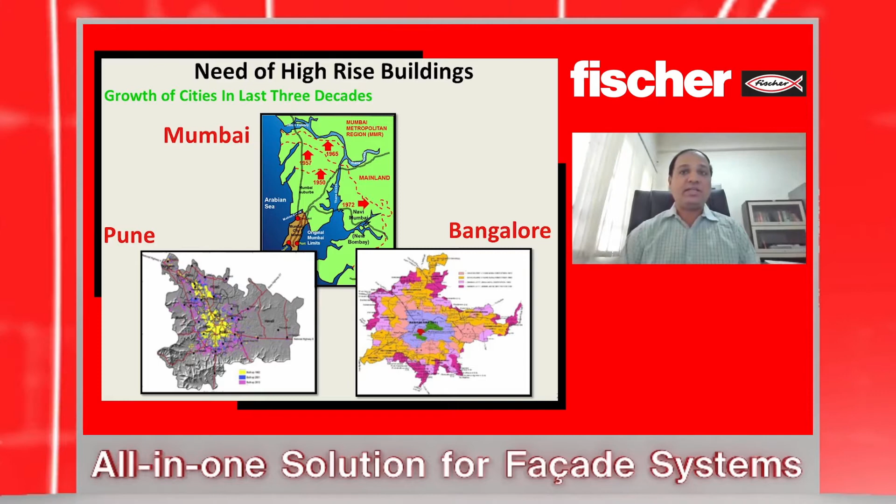We can't afford to expand our cities further because we need to make sure occupants remain connected to educational hubs as well as commercial hubs. As a result, we need to use land more efficiently so that we can accommodate people as well as workspaces in the available land. So then there is a need for high-rise buildings.

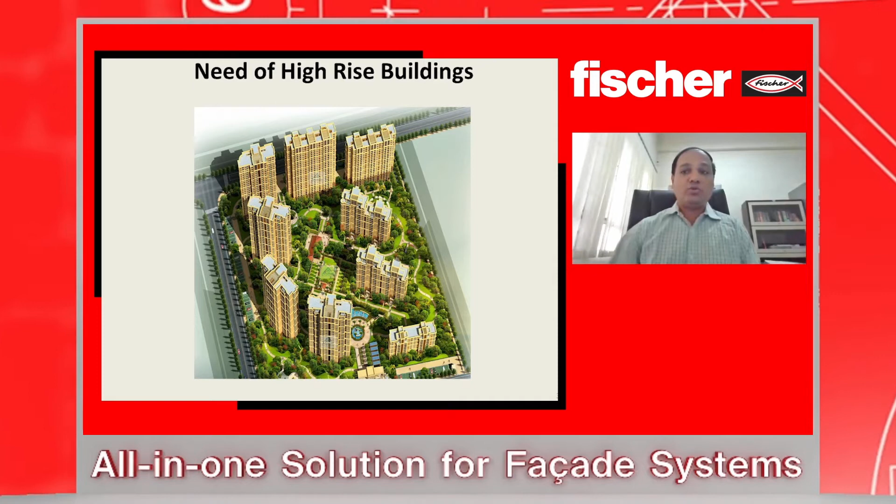Traditionally, if you look at high-rise buildings constructed a couple of decades back, they were constructed with concrete, and infill walls were made of brick masonry. The problem with this kind of construction is that brick masonry walls put up substantial dead load, and as a result there is a great need of engineering material, which adds to the cost. To solve this, there are facade systems which are useful and which reduce the dead load substantially. This is one characteristic of facade that reduces the dead load of the building substantially.

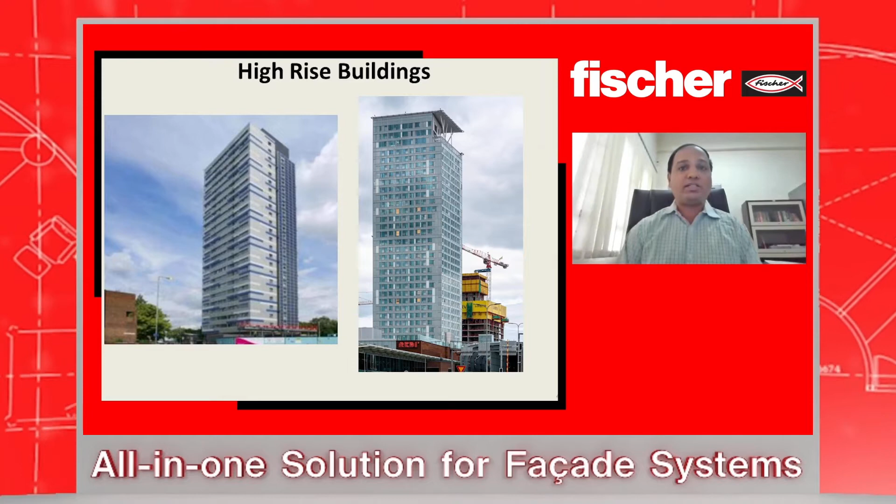However, there are several more advantages of facade systems, and in order to understand those, one needs to first understand the various kinds of loads which typically occur in a high-rise building. As engineers, we know the typical loads coming onto a structure are of two types: gravity load and lateral load. Gravity load comprises the dead load and live load, which act in a vertical direction, while lateral loads are caused by wind actions as well as earthquake actions, and act in the lateral direction.

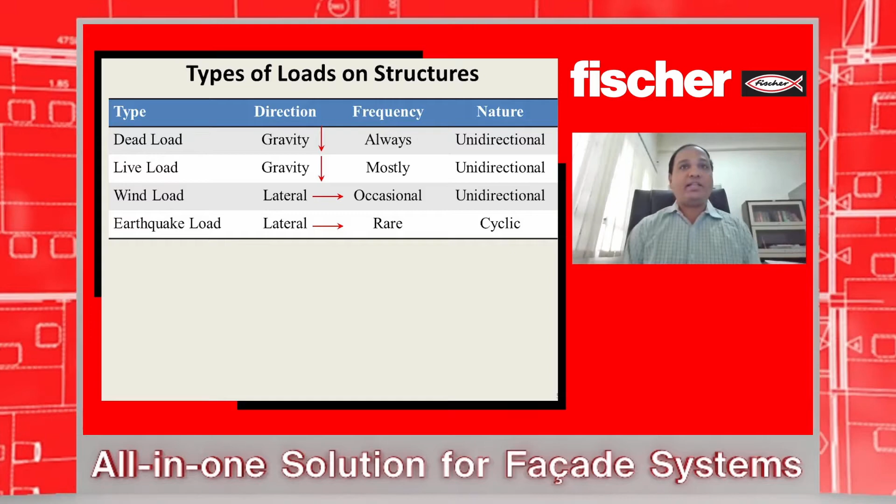Whenever we design a building, particularly a high-rise building, the vertical load is naturally taken care of by the structural elements, but special care or attention needs to be given to carrying the lateral load to the foundation. For that, we need an efficient system along with a built-in lateral resistance system. So to understand that, let's quickly understand the behavior of various lateral loads. We have two loads: wind load and earthquake load.

The fundamental difference between wind load and earthquake load is that wind load is a load exerted by the wind on a building. On the other hand, the earthquake load is not a load that is exerted externally. It is typically the load created because of the mass of the building.

So what happens during an earthquake? The ground shakes in one direction and the building tries to remain at its position. Because of that, there is an inertial effect, and due to this inertia effect, a force is created on the building, which we can calculate using Newton's second law. So the earthquake load is a more implicit load, while the wind load is a more direct load.

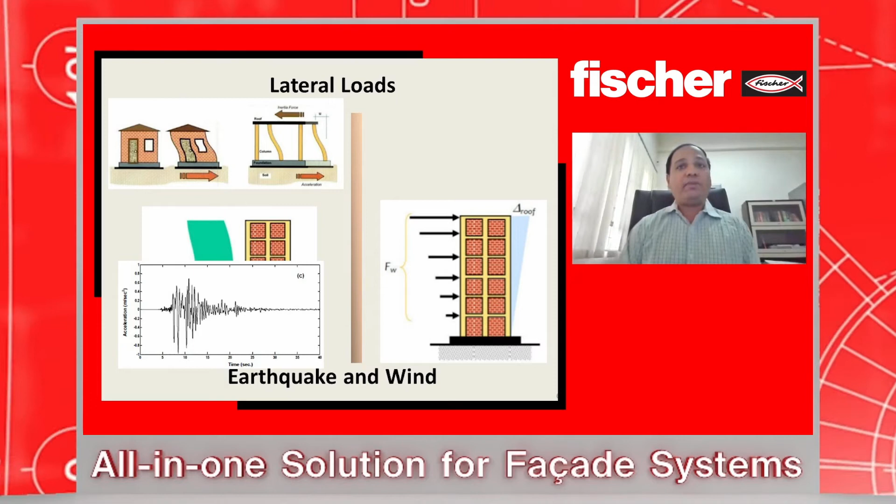Another difference between these two loads: the load pattern of an earthquake is cyclic in nature, while the wind load usually acts for a significant period of time only in one direction. As a result, high-rise buildings are typically governed by the wind load compared to the earthquake load, and we will see the reason for that in a while.

If you consider a wind load acting on a structure, the wind load acts only in one direction, and the magnitude of the force depends upon the surface area of the building. In high-rise buildings, since we have smaller plans and larger heights, the surface area of the building is substantially high.

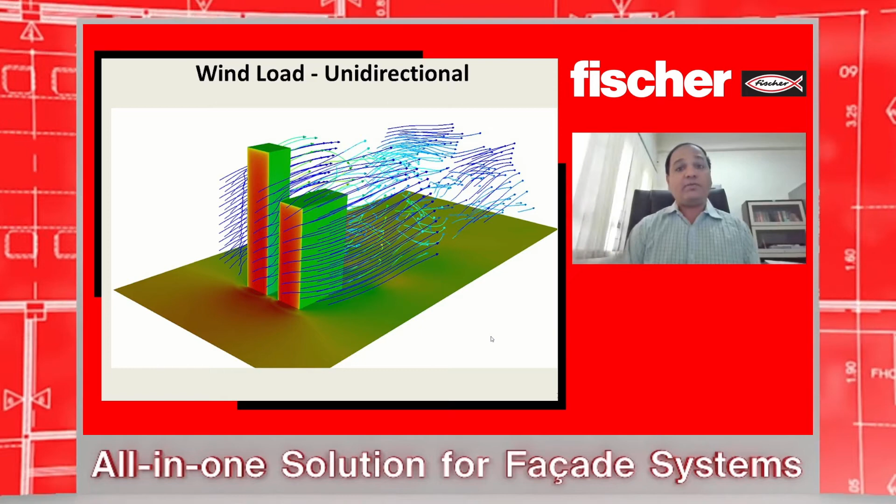As wind blows along the building direction, it exerts pressure, and because of that, the building deflects in the direction of the wind. Typically, since wind is a non-cyclic load, this deflection causes a P-delta effect, and because of this P-delta effect, the gravity load, which is acting at all times, can cause additional deformation. This can create a problem in a high-rise building, because you need larger stiffness to ensure the building is not deflecting excessively, but that would lead to an increase in the cost of material and construction.

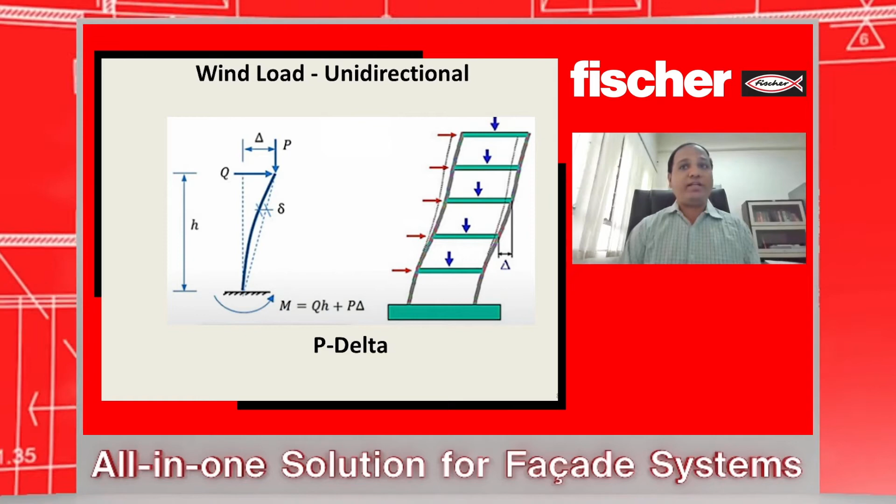So what is the solution for this? If we could change the direction of the wind in such a way that it acts in the reverse direction, so that the deflection of the building can naturally subside, that would be useful to reduce the deflection and reduce the cost of construction of the building.

So facade systems are useful to create such a change in the direction of the wind. Typically, when a facade system is placed on the building, it changes the direction of the wind, which we call the vortex effect. Because of that, there is pressure now acting in both directions when the wind blows in a single direction, and as a result, it reduces the deflection of the building and reduces the P-delta effect.

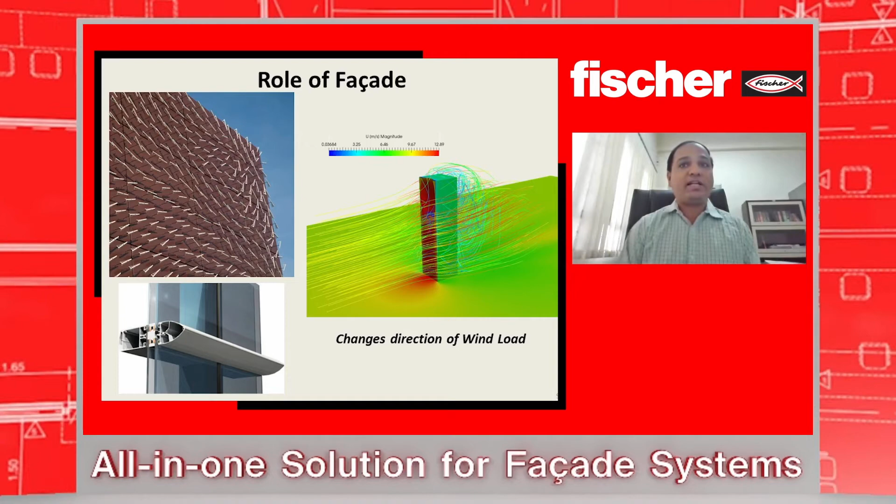So facades play a very important role in the design of high-rise buildings, particularly when those buildings are governed by wind loads. Another useful advantage of facade systems is that they also add strength and stiffness to the building. Whenever there is an addition of strength and stiffness, we could use that property to resist the earthquake load, because earthquake loads are typically resisted with the help of strength, stiffness, and ductility.

So facade elements also provide us places to dissipate energy. In addition to that, the facade structure provides us the space to accommodate various kinds of energy dissipation measures, such as friction dampers as well as fluid viscous dampers. Nowadays there is a lot of research already being done to install these dampers in facade elements.

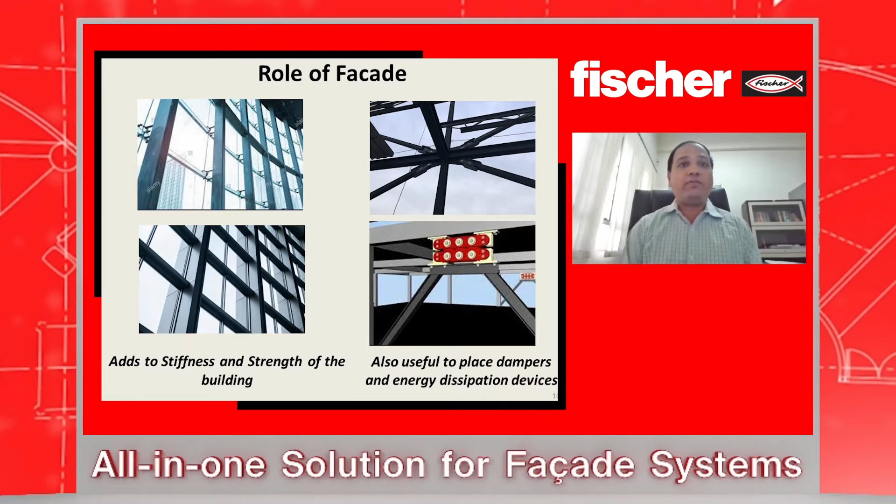So as we can see, facade elements are an integral part of high-rise buildings, and they are very important when it comes to reducing the earthquake and wind effect on a building. But in order to ensure that the facade system works efficiently, we need to connect them rigidly and efficiently to the main structural system. So there comes the important role of the anchor.

In another application, we could see that the role of anchors is also very important in other areas, which is repair, rehabilitation, and retrofitting. Typically, as a civil engineer, we tend to focus more on the creation of new buildings. However, with the large number of existing buildings, there is also a large need for doing repair and rehabilitation of existing buildings.

The reason for that is that we also need to reduce the carbon footprint to reduce the effect of man's activities on the environment. So there is a need to ensure that existing buildings will last for a longer duration, so that there is less need of creating new buildings.

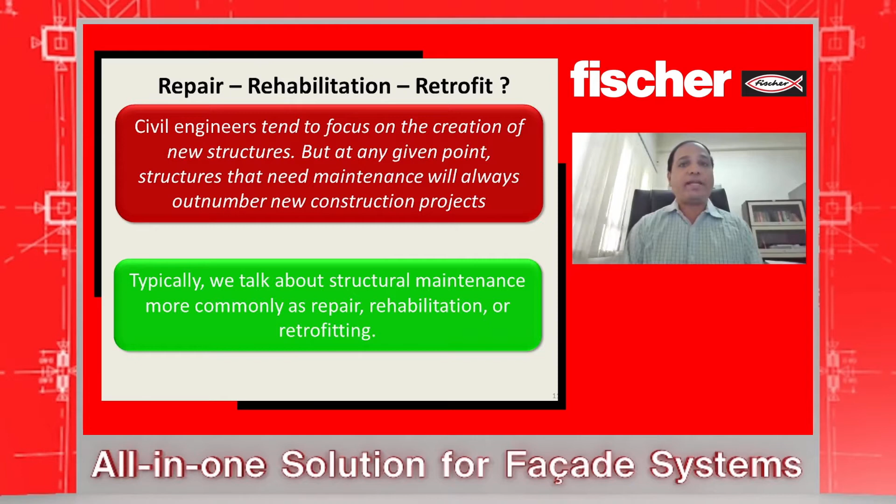So for that, the typical terms which are used are repair, rehabilitation, and retrofitting. We'll quickly see the meaning of these three before moving to the application of various systems for repair and retrofitting, and the role of anchorages.

Typically, when you have a building that deteriorates over time, and let's say if there is an extreme event like a hurricane or earthquake, there is a substantial drop in the strength of the building. Now, if you carry out any activity which increases the strength of the building to the strength it had before the event, then we call it a repair measure.

If we improve the building such that the strength increases to the level it had at the time of construction, then it's called rehabilitation. While if we carry out a measure in which we increase the strength of the building so that it meets the current standard, then it is called retrofitting.

So these are the three terms which are commonly used, and depending upon the usage of the building, we can choose any of these three measures.

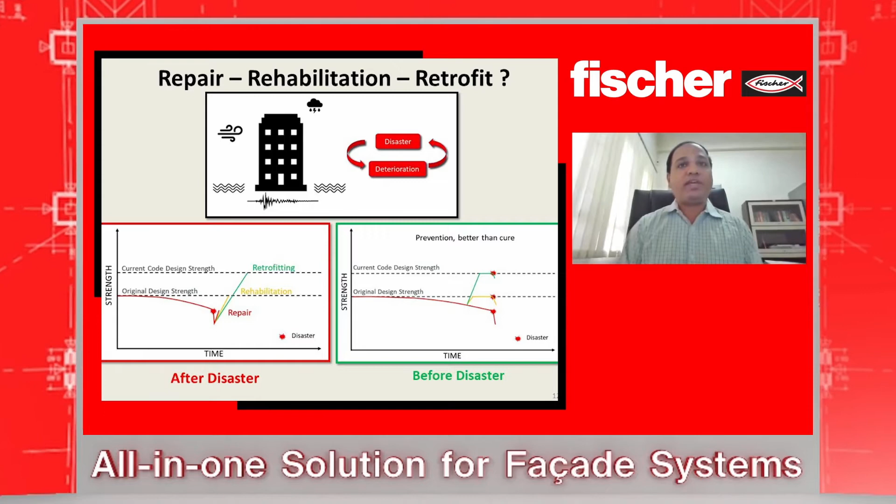There are various techniques which have been developed over time by research engineers that can be placed into the existing building to improve its strength and carry out retrofitting activities. However, the important problem is we need a system to connect these additional elements in the existing building, and for that we need various kinds of connections and anchorages to connect this system with the existing frame elements.

Thankfully, much research has been done, and various anchors and processes developed by companies like Fischer can be efficiently used to connect such braces in the existing building for retrofitting and repair measures.

So in conclusion, we need several anchorages, not just for connecting braces to the existing building, but also for connection of facade in case of high-rise buildings.

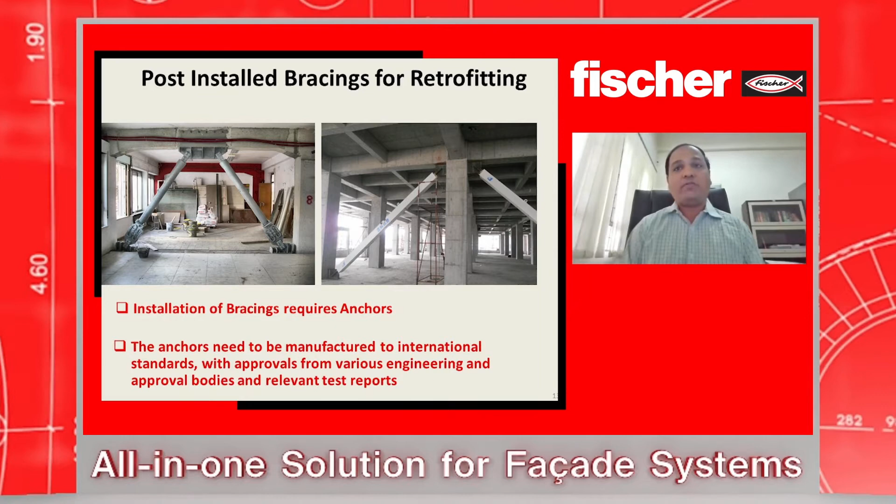I'm very glad to see that Fischer has taken a step to organize this event, which is beneficial to practicing engineers. I congratulate Fischer company as well as its employees for arranging this event for professional engineers. So my best wishes for this event. Thank you.

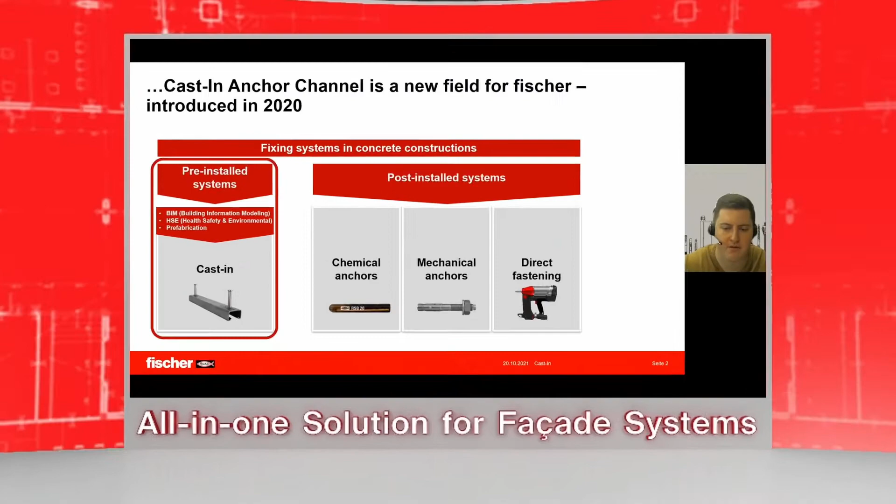What does cast-in system even mean? In the year 2020, we decided to introduce the cast-in anchor channel as a new field for Fischer. We can see here there are various fixing systems, most of them classified as post-installed systems. For example, we have the chemical anchor, the mechanical anchor, and also direct fastening options. Now we're also going into the option of pre-installed systems, which would then be basically any type of cast-in, in our case specifically the cast-in channel.

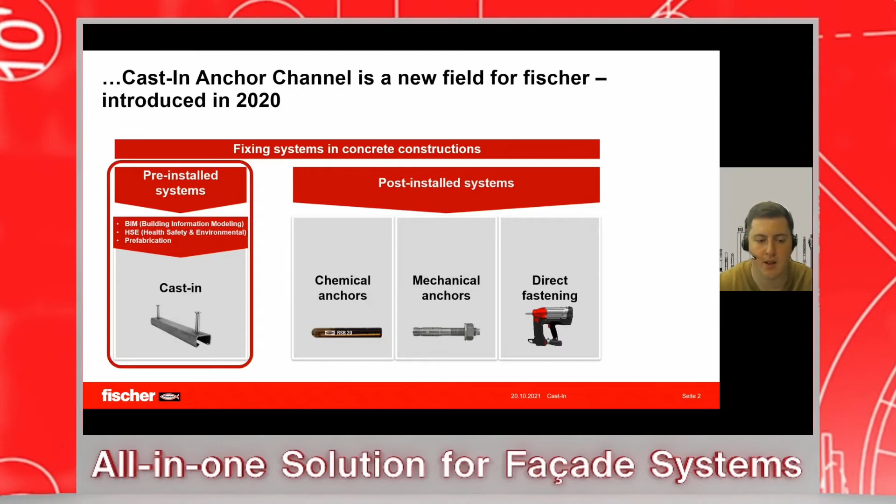We believe that cast-in will one day be the leading fixing method for new concrete construction, and there are a couple of reasons pointing in this direction. That's also why Fischer, commonly known as a company that manufactures post-installed anchors, has now decided to go into the pre-installed business as well. One reason is building information modeling - we know nowadays we can pre-plan everything a lot better, it's easier to pre-plan. And the question always arises: why, if you pre-plan everything, would you still want to actually drill into the concrete?

Second would be health, safety, and environmental regulations. On some job sites globally, there are already restrictions on noise level, so drilling is not seen so often, or there are dust-free job sites where different drilling technologies have to be used, and so on.

Also, we can notice that globally the level of prefabrication is generally rising, so it makes more sense, if you already prefabricate the concrete element, to implement the anchoring elements or whatever you need already in the factory and not do it afterwards on the job site.

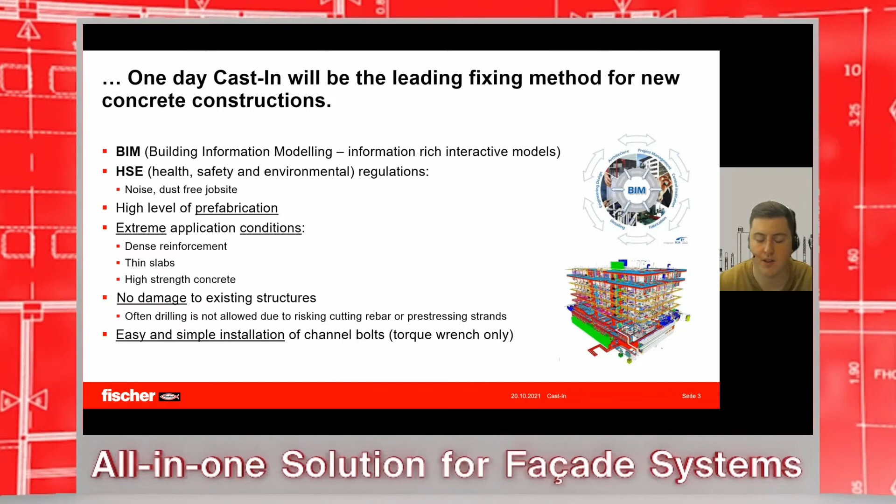Also, more and more we face extreme application conditions, mostly dense reinforcement. I think we have all faced those issues when trying to drill into a slab and just not getting through because there's so much reinforcement and the concrete is also so high in strength. Also, we avoid risking any damage to existing structures - sometimes drilling is not allowed, so this helps with that issue. And then it's also quite an easy and simple installation: after we have fixed it into the concrete, we just need a torque wrench, no special machinery or tools.

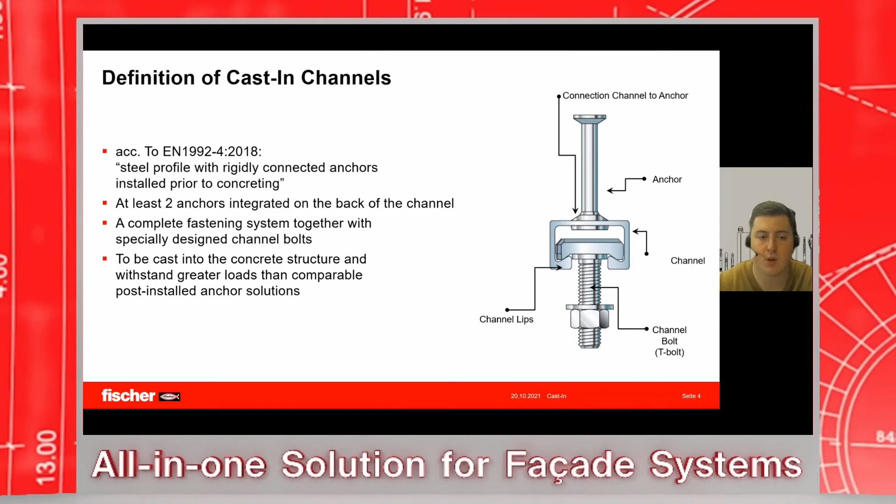Speaking about the cast-in channels, you can see here on the right side we have our anchor. On the back we have our channel, of course. We have the connection channel to anchor, this is sometimes referred to as well. We have our channel lips, and then also we have our channel bolt, or because of its T-looking shape it's also mostly called a T-bolt. Together this builds one fastening system, and there should always be more than one anchor fixed on the back - otherwise, as per the code, it's not a cast-in channel, it's a single point fastener.

Okay, speaking about the applications in facade, we have basically three applications of how those channels are being used. Most of them are commonly known as top of slab, which is more than 80% of all applications. Then we also have front of slab application, this is also quite familiar. And then we have bottom of slab with a double channel, as you can see. This is not so common, I would say - mostly common in the United States, but also maybe in India, I'm just not up to date.

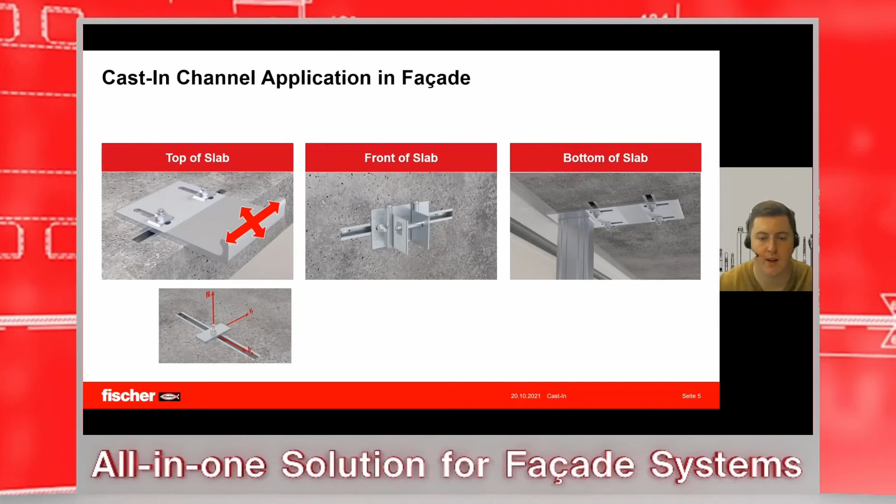Speaking about the benefits of cast-in channels, when we see these two pictures, we know that the cast-in channel is basically a long piece - it's a channel, so we can adjust in the direction of the channel. Given that the brackets also have slots, we can adjust with our T-bolts in 4 directions, so we can basically cover all tolerances in the 2D plane, and this gives us a very big advantage over post-installed anchors.

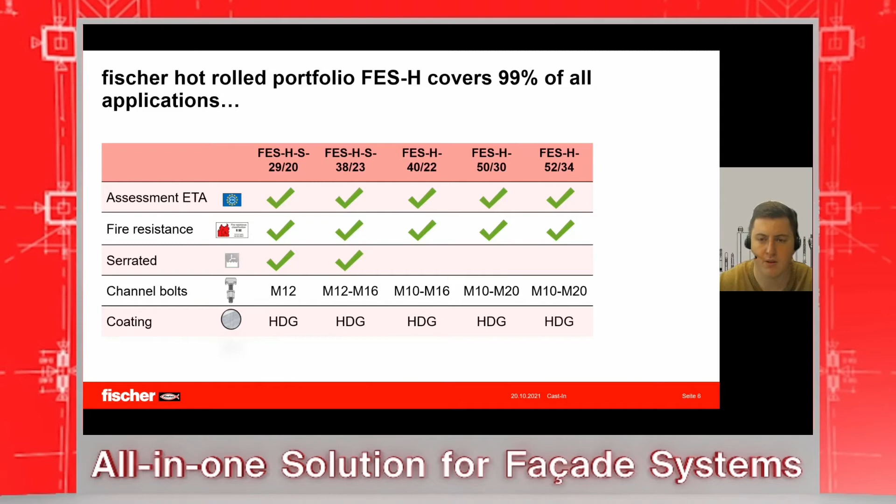We also have options with I-anchor. Those I-anchors typically have a higher performance in steel capacity in the anchor itself, and also in connection channel to anchors. They're not so commonly used in facade, but still I wanted to show you.

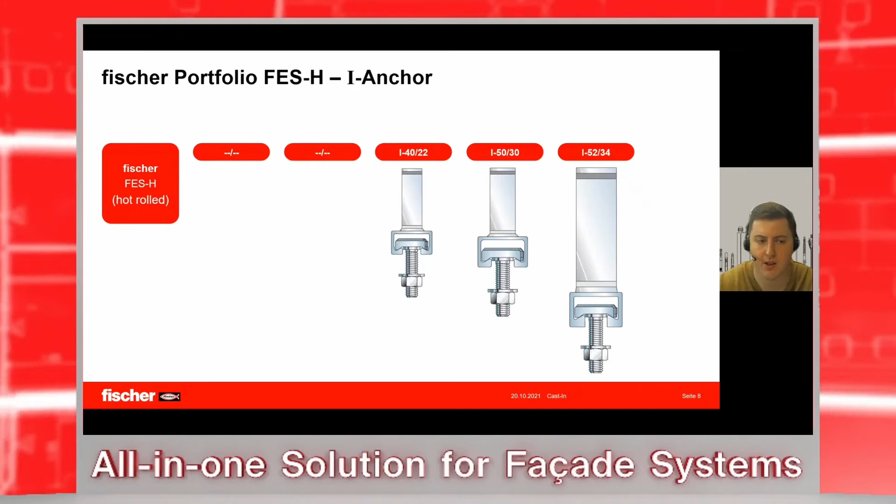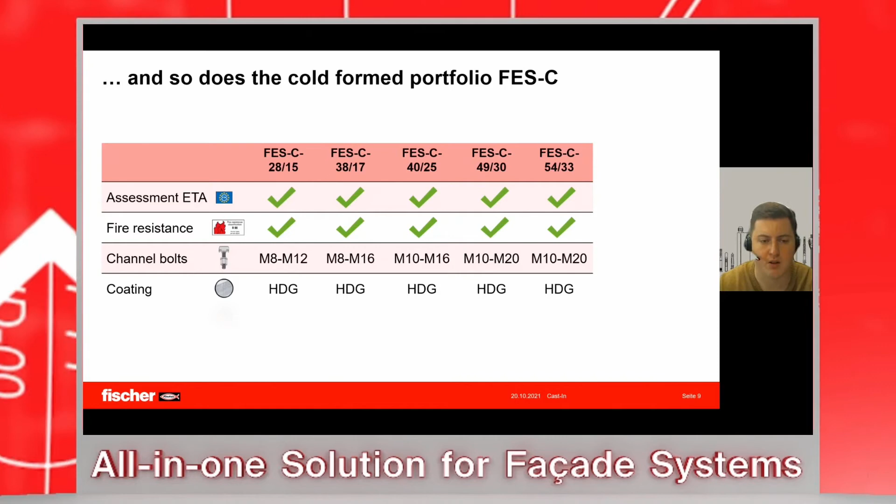And then also we have, of course, our cold formed portfolio, also with 5 profiles. We also match the market standard we have in ETA, and also the fire resistance report. And then also how it looks like - it's a round anchor, cold form portfolio. And you can see here in the picture.

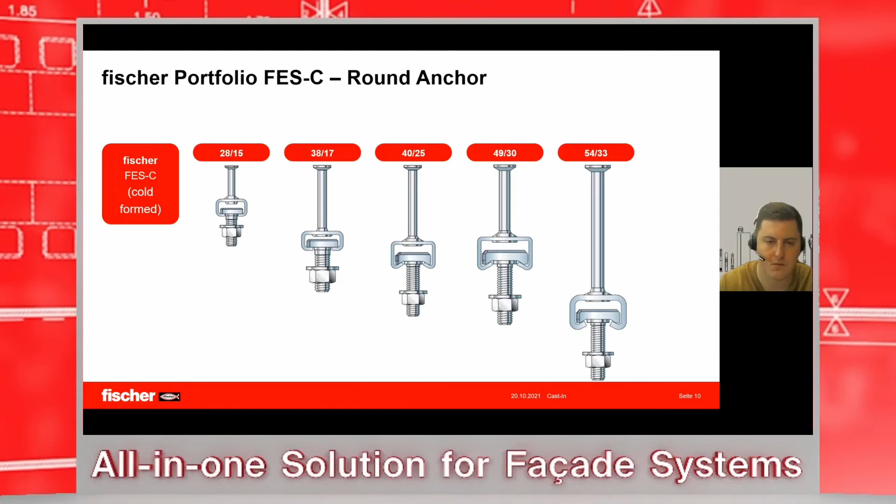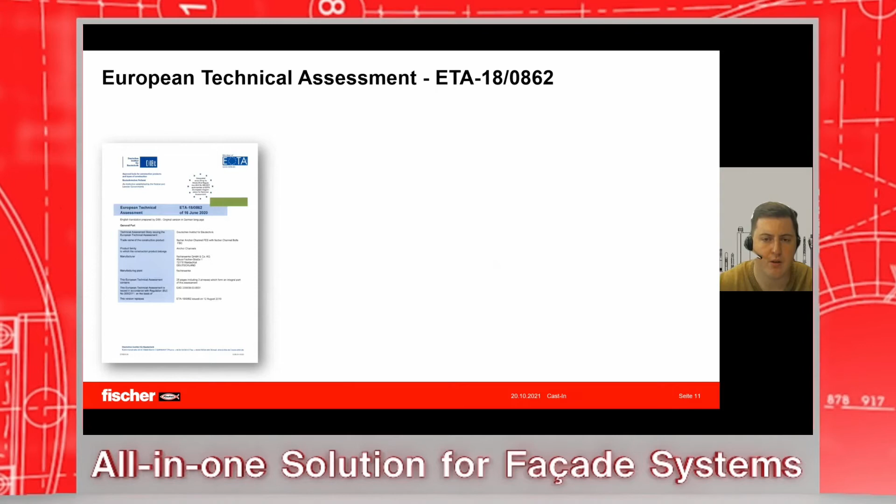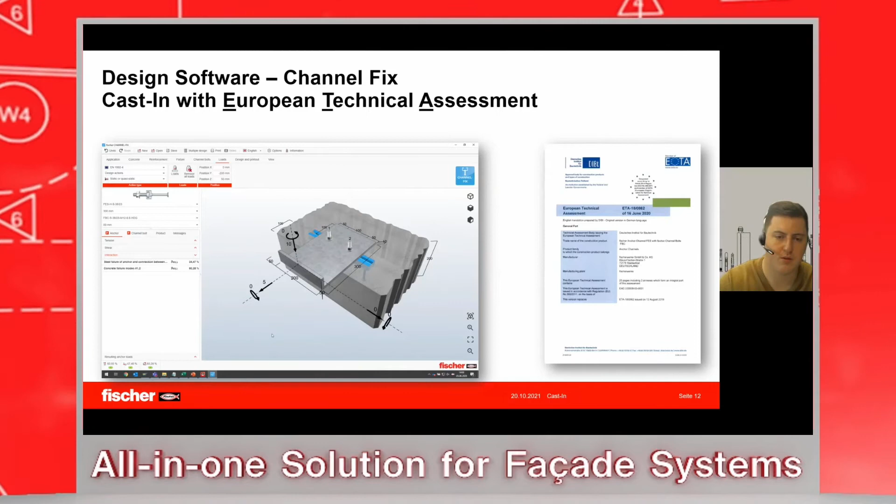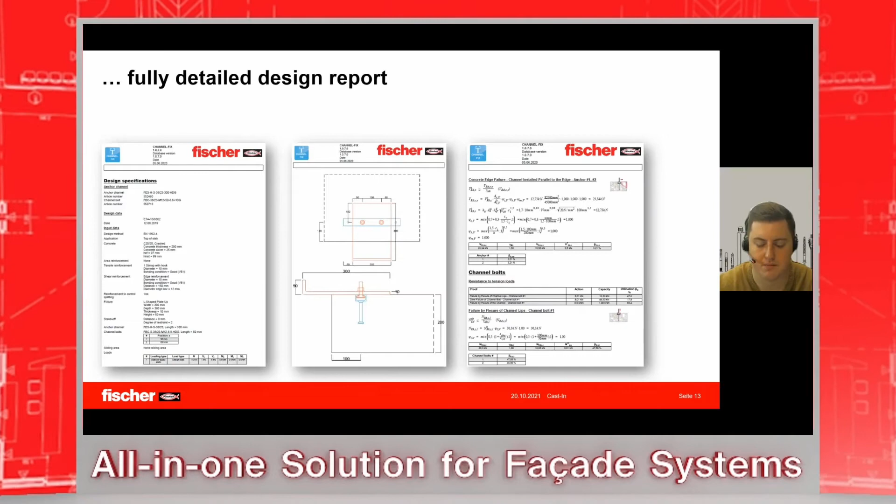Now, shortly jumping into the ETA, we also have a European technical assessment for our cast-in channel system. And when we look in our design software, we can now design the products referring to this European technical assessment. Of course, our design software follows our company internal standards in terms of usage and user friendliness. So we also have a fully detailed design report, as you can see here in the pictures.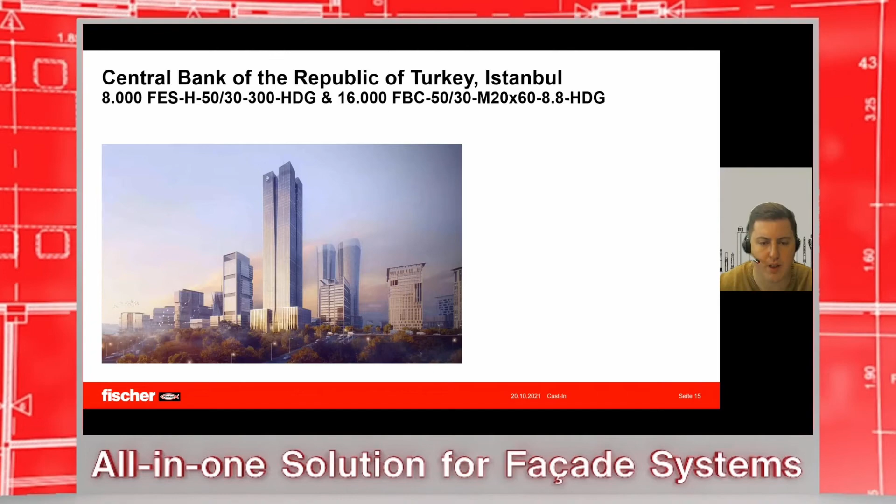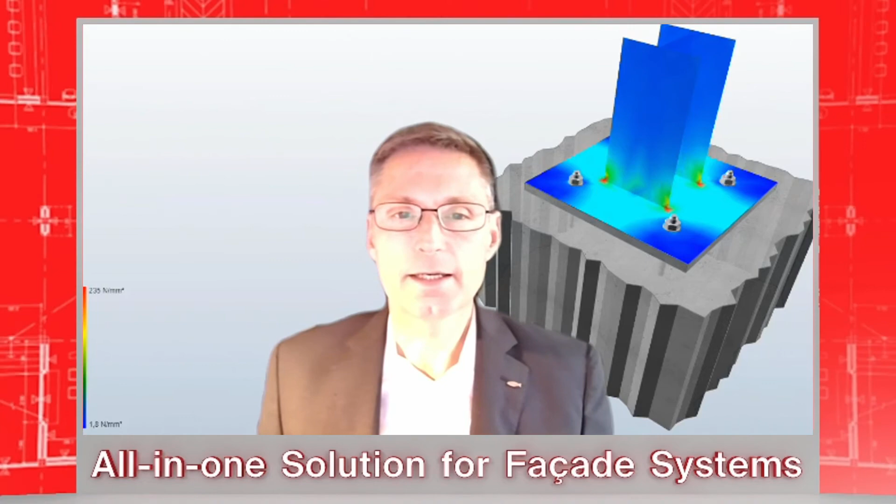Anchor design in concrete, as state-of-the-art, EN 1992-4, Part 4 of Eurocode 2, is used in Europe for design. Eurocode 2 Part 4 has quite some restrictions and requirements when it comes to anchor design in concrete, and one of these restrictions is that a sufficiently stiff base plate is required.

Why is that? Because the first step in every design of fastenings in concrete is the determination of the anchor forces based on the external forces. This determination is based on the assumption of a linear strain distribution. Finally, after the design, you have to show that this linear strain distribution is also realized in practice, meaning your base plate is sufficiently stiff.

However, there is no tool really available and described in EN 1992-4 to show that your base plate is sufficiently stiff. In the past, there were some tools based on yield criterions. However, a yield criterion is not a stiffness criterion.

In this area, in the last few years, spring models became very modern. With spring models, you model the anchor plate and the profile with a finite element mesh, and model the anchor as tension-only springs and the contact to the concrete as compression-only springs. With this relatively easy finite element model, you can determine if your base plate is sufficiently stiff, and you can also develop a completely new design method.